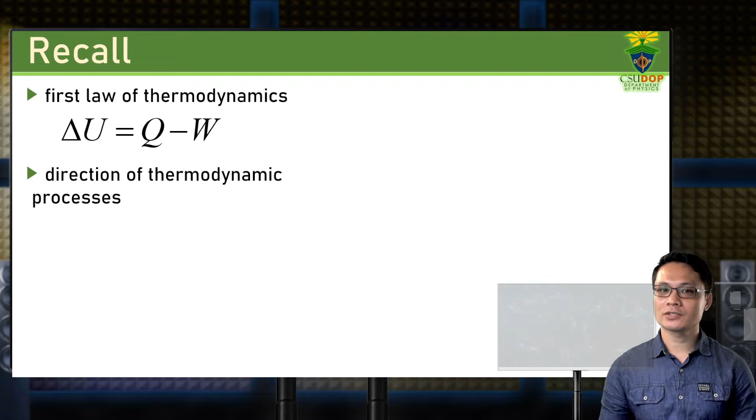Welcome back to this class, Thermodynamics. In our previous discussion, we talked about the first law of thermodynamics, the thermodynamic processes, the change in internal energy of a system, and the direction of thermodynamic processes.

In this lesson, we'll be talking about heat engines. And again with me in this course is Dr. Jonathan P. Manigo. In our time, we are familiar and exposed to heat engines.

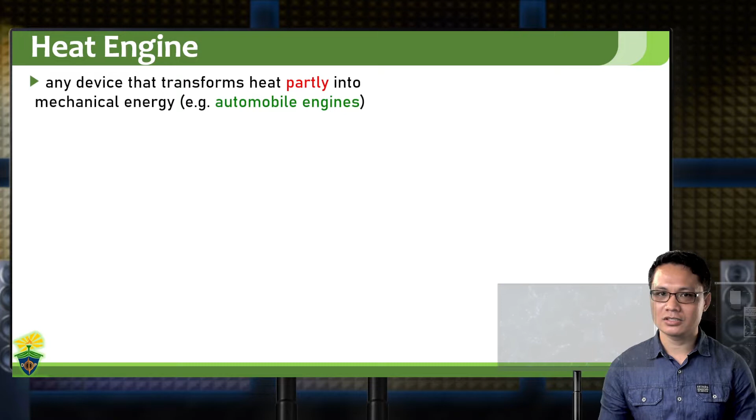A heat engine is any mechanical device which has the ability of transforming part or portion of the heat energy introduced or given to this engine into some mechanical energy or mechanical work. The common example of these devices or engines are our automobiles or car engines.

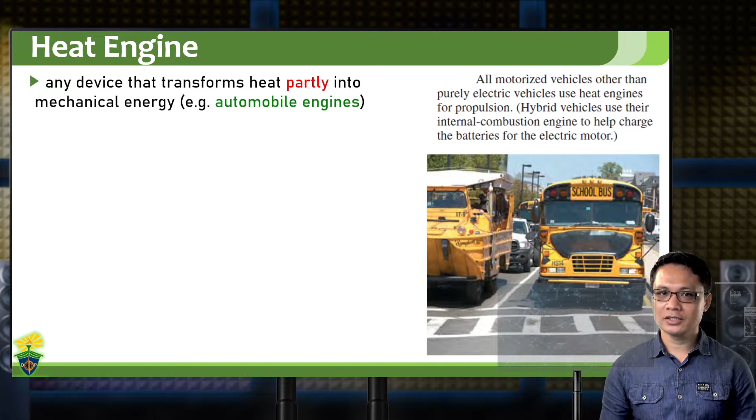Car industry for a long time has been driven with heat engines. But of course with recent technology, some are purely running on electricity and some are running purely on internal combustion mechanisms. But for the simple concept of mechanical heat engine, this is a cyclic process.

Example, a steam turbine. The primary matter used for the cyclic process is water, where there is a liquid form of water converted into its gaseous form, making the turbine rotate and therefore enabling the car transmission to rotate its wheel system.

The process of making this engine operational is trying to maintain its internal energy, by which the change of internal energy would always be equal to zero. Because if the internal energy of a steam engine would change over time, it would mean that the engine will stop working. So for a good performing heat engine, its change in internal energy should always be equal to zero. But it does not mean that the engine is not using or releasing any form of energy.

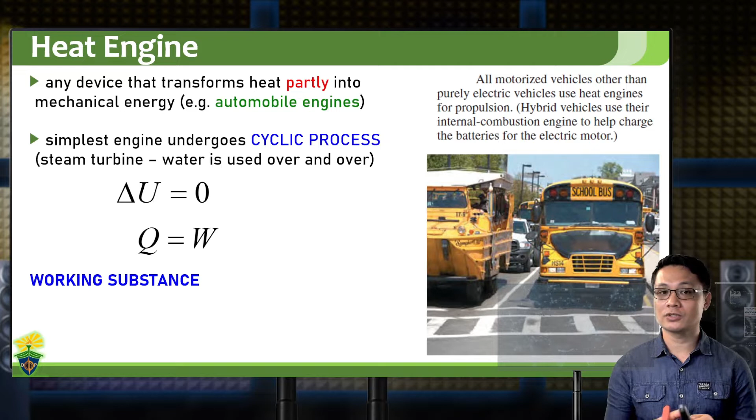It's just that the amount of heat being given to the system would always be equal to the work done by the system. So the working substance for a heat engine may vary depending on the application and the source of the working substance or matter.

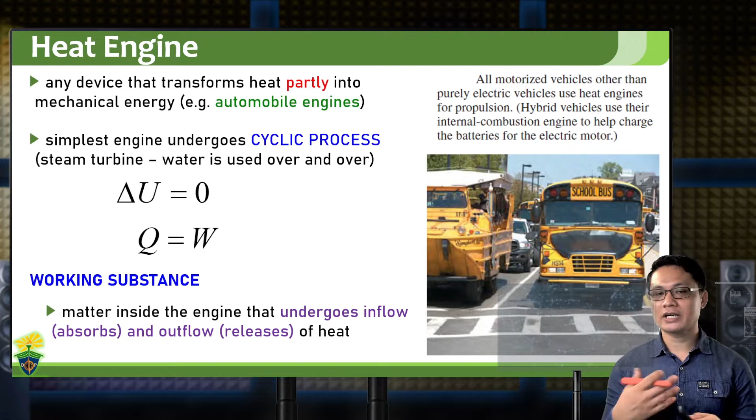These are designed specifically for a specific design of engine. There are engines which require gasoline, there are engines which require diesel, and there are engines which require steam. But the concept is just to provide a mechanism for the cyclic process to occur within a specific type of heat engine.

The concept of heat engines is just a simple mechanism by which you have a source of heat, source of energy. We call it the hot reservoir with some temperature TH, which is the source of the quantity of heat from the hotter region, which will be converted or utilized by the engine.

For this particular illustration, we have the engine in a circle shape. This represents the engine, where this circle, or the device which performs the heat engine mechanism, would separate this amount of energy or heat into two forms.

One form is, of course, the mechanical work that this engine is doing to deliver its job, and some of this heat or energy will be converted or discarded into some other form.

The usual scenario where we experience the conversion of this energy from the hot region to its working mechanism is our engines in motorcycles or automobiles, part of which is converted into the gear mechanism, the working mechanism of the gears of the engine, and some is converted into some form of sound waves.

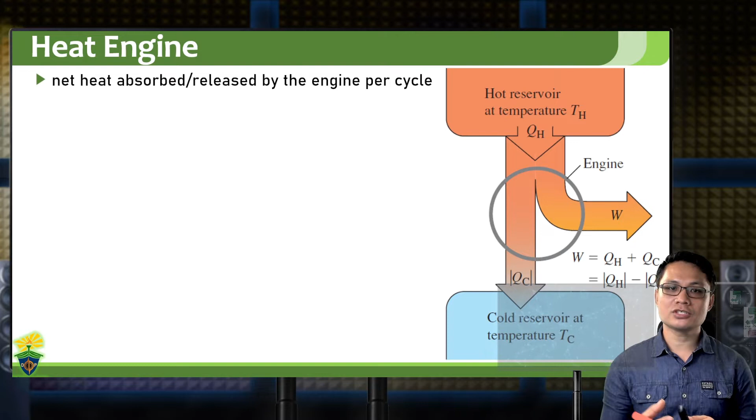Those are discarded energy. The most obvious conversion of energy is the heat which is dissipated around the engine towards its environment. This mechanism of conversion of heat energy given or introduced into the heat engine will always be conserved. This is the mathematical representation, where in reality the amount of heat discarded into the environment or the cold reservoir is, mathematically, in a negative notation.

So the net work done by or on the engine per cycle is just equal to the amount of heat the engine is using from the hot reservoir, less the amount of heat absorbed by the cold reservoir. So the total input of heat

given or introduced into the engine would always be equal to the output heat or energy delivered by the engine through its work and absorbed by the environment. This is the cyclic process: some amount of energy is given to the engine from the hot reservoir, some is converted into mechanical work, and some is converted or delivered towards the cold reservoir.

Because of this separation of the work delivered by the engine and the amount of heat being absorbed by the cold reservoir, there is an important performance measure of the engine, and that is the thermal efficiency, which is also related to the mechanical efficiency of a heat engine.

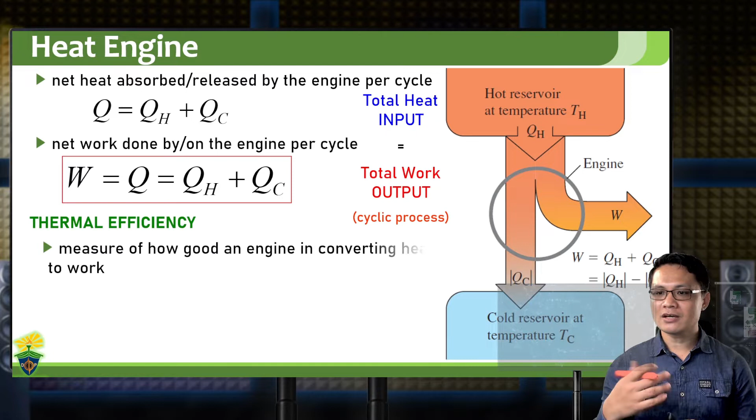This thermal efficiency is a measure of how good the engine works. This is the ability of the engine to deliver mechanical work relative to the amount of heat it is absorbing from the hot reservoir and the amount of heat discarded towards the cold reservoir.

This thermal efficiency, or engine mechanical efficiency, is the ratio between the actual work done by the engine over the amount of energy given by or taken from the hot reservoir. If you want to express it as a percent, simply multiply this by 100%.

This can also be calculated by adding 1 to the ratio between the amount of heat expelled to the cold reservoir over the amount of heat being absorbed from the hot reservoir.

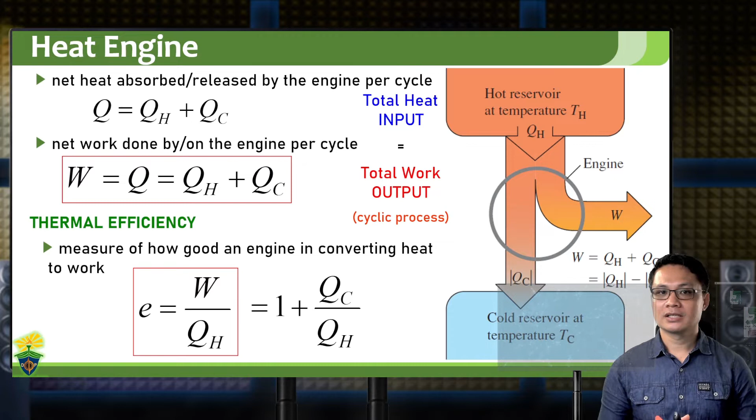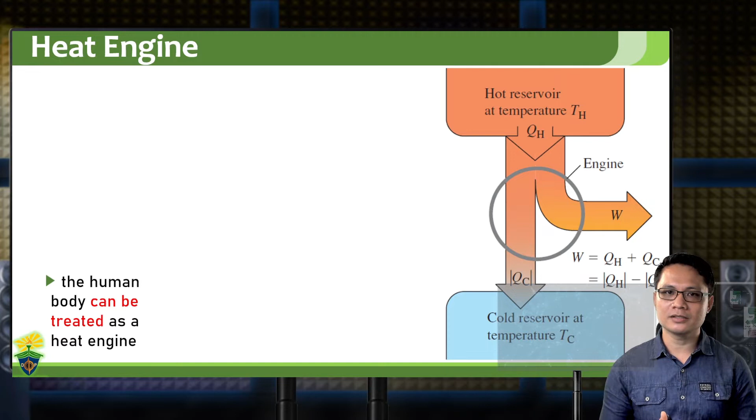Our body can also be treated as some kind of heat engine, though our body operates in a very complicated mechanism. But we can apply some concept of heat engine to how our body operates. We take some source of energy which are later converted into usable energy form for our body to function, such as muscle work.

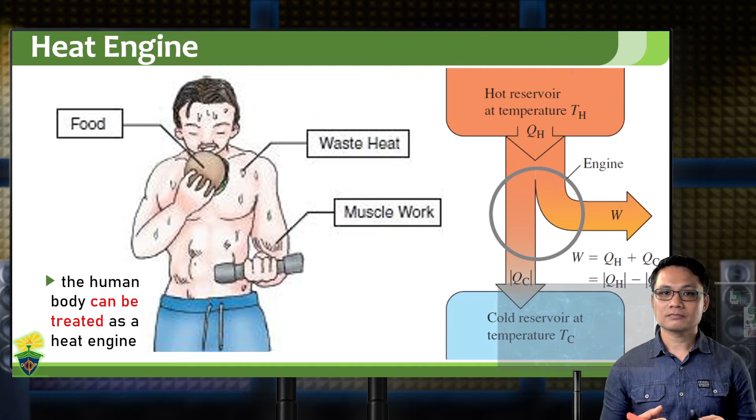In the process, not all of the energy contained in our food or drinks is converted into mechanical or usable work. Most of this energy is converted into waste, some in the form of sweat, some in the form of urine and stool. Our body also dissipates or discards energy that is not converted into mechanical work.

As an example, we will analyze how a heat engine converts and processes energy and how this cycle occurs, or how this cyclic process behaves over time.

Let us consider a simple gasoline engine in a large truck which takes in an amount of heat of 10,000 joules and delivers only 2,000 joules of useful mechanical work per cycle.

The heat is obtained by burning gasoline, since this is a gasoline engine. This kind of gasoline has a heat of combustion given as 5 times 10 to the power of 7 joules per kilogram. For one kilogram of this gasoline, it would require 5 times 10 to the power of 7 joules for it to be fully burned.

So we have the following questions to answer. First, what is the thermal efficiency of this engine? Second, how much heat is discarded per cycle? Third, if the engine goes 25 cycles, or works 25 times per second, what is the power output of this engine in watts and in horsepower? Then, how much gasoline is burned in each cycle? And lastly, how much gasoline is burned per second and per hour?

For letter A, from the equation given, we can solve for the efficiency of the engine as the ratio between the actual work done by the engine and the total energy given off by the hot reservoir. We have 2,000 joules being used by the engine in doing its actual work over the 10,000 joules delivered into the system. So the efficiency of the engine is 0.2, or simply 20%.

This 20% efficiency means a lot of energy is being discarded into the cold reservoir. For letter B, we solve for this amount of energy being discarded. We have the equation that the total work done by the engine is the sum of the total energy from the hot reservoir and the energy given off to the cold reservoir. Simplifying, we get the amount of heat given off to the cold reservoir as the difference between the work done and the heat from the hot reservoir, which is 8,000 joules.

It is said that the engine goes 25 cycles per second, meaning every second the engine performs 25 works. Remember that power is expressed as the amount of work done over how long this work takes, so power equals work over time. Since we are given the frequency, the amount of work performed by the heat engine every second, we can solve for the time as 1 divided by 25 cycles per second, which gives us 0.04 second.

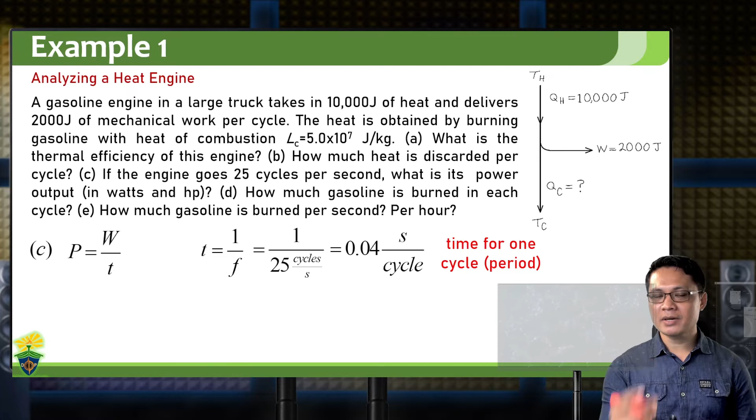So that's the amount of time used by the engine to perform 1 cycle. This will give us the power of the engine to be 50,000 watts, where we have this conversion that for every 746 watts, that is equal to 1 horsepower. Then this will give us that the horsepower of this kind of engine is 67 HP.

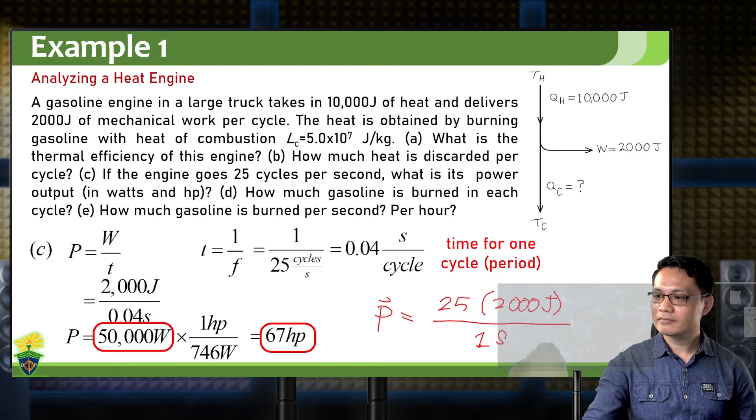And alternatively, we can solve this like the power of your engine is just equal to 25 cycles, where in every cycle it requires 2000 joules. This 25 cycles is done in just 1 second. Again, this will give you the same value of 50,000 watts.

So now we will try to solve for the amount of gasoline being burned by this engine. So we have the amount of heat given from the hot reservoir, which is the source of the work done by the engine, and some of it is being discarded into the cold reservoir. Since we are given with the heat of combustion of this kind of fuel or gasoline, we can solve for the mass of the gasoline being burned just to generate 10,000 joules of energy.

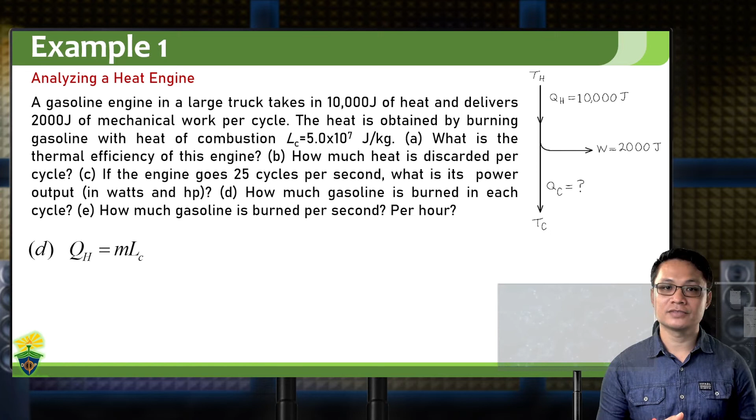So we have here the 10,000 joules divided by the heat of combustion of the fuel or the gasoline, which is 5 times 10 to the power of 7 joules per kilogram. And with that, the amount of gasoline required for this kind of engine to generate a heat of 10,000 joules is 0.2 grams.

Then, for every 0.2 grams of gasoline per cycle, which is performed by the engine in just 0.04 seconds, the engine used 5 grams of gasoline per second. And converting this to amount of energy for an hour, we have 1 kilogram, which is just equal to 1,000 grams. And for 1 hour, we have 3,600 seconds. Then this will give us 18 kilograms of gasoline per hour.

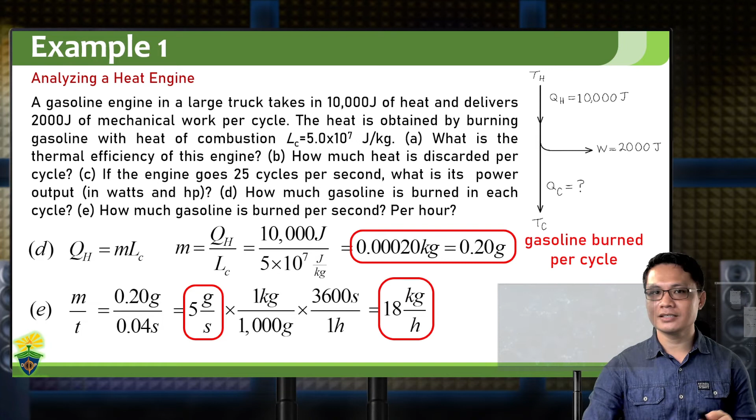And this 5 grams per second, you can solve this directly by just multiplying 25 cycles divided by 1 second, because we know that the engine is doing 25 cycles per second. Then the same would give you a value of 5 grams per second. And again, the total amount of gasoline being burnt in this kind of engine in 1 hour is 18 kilograms.

So with this kind of understanding, you can actually calculate your expenses when it comes to the amount of gasoline your car or your motorcycle or your heat engine in general is using every time you run your engine. Now, the more your engine performs more cycles in 1 second, it would entail more gasoline being burned per second. And eventually, the more you allow your engine to do its work, the more it would require gasoline for it to perform that work.

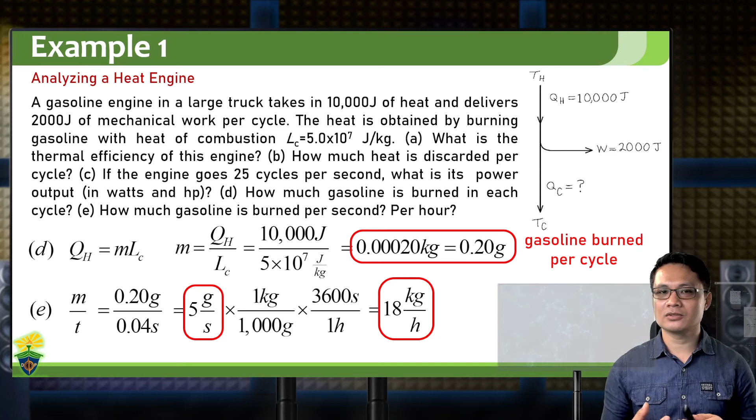And remember, just like the literal engine, our body is not converting the energies perfectly into usable work. On average, our body is also at around 20% efficient in converting energy into usable work.

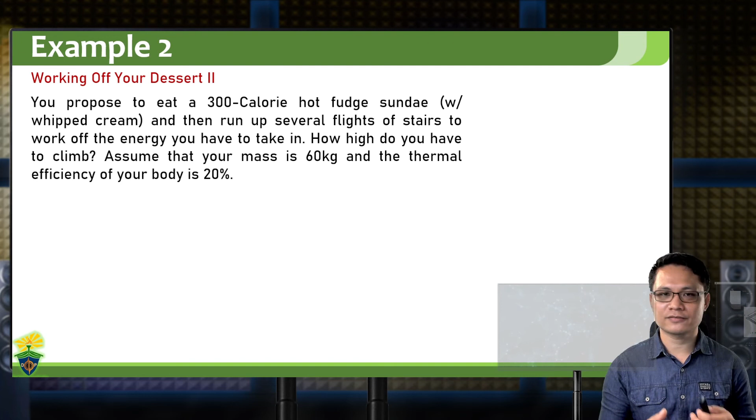So if you are around 60 kilograms and with that body thermal efficiency of 20%, we will try to solve this just a serve of hot fudge sundae with whipped cream to ensure that you will not store up this calorie into a form of fat in your body. You need to work off this 300 calorie energy. So the question is, how high?

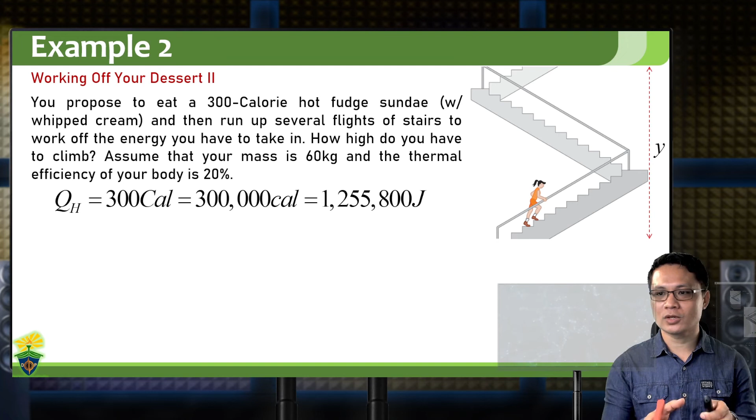How high? The letter Y here. How high you should be climbing to burn this calorie up. So you have the total amount of energy that is considered to be the energy from the hot reservoir, which is 300 calorie with capital C, which is just equal to 300,000 calories, or that is just 1,255,800 joules. We have this conversion that for every 1 food calorie, capital C is just 1,000 calories, or that is 4,186 joules.

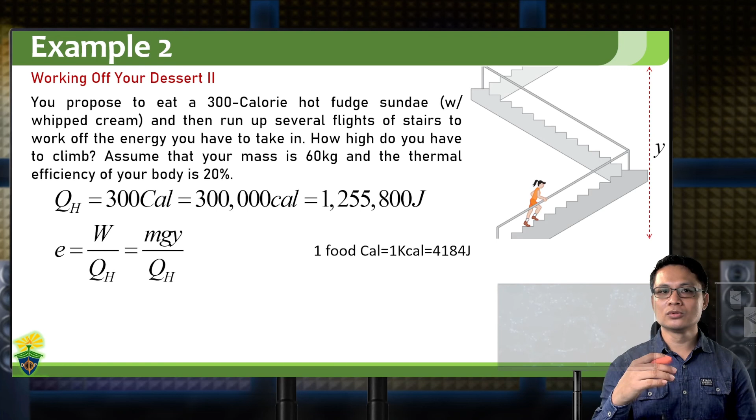Now, from the efficiency given, we can solve for the vertical height which we need to go. And this work that your body would be doing is working against gravity, and that is, you need to gain gravitational potential energy, which is expressed as mgh. I hope you can still remember this one. So from this equation, we can simplify the expression, extracting an expression for Y, and that is just efficiency times the total amount of heat from the hot reservoir divided by mg.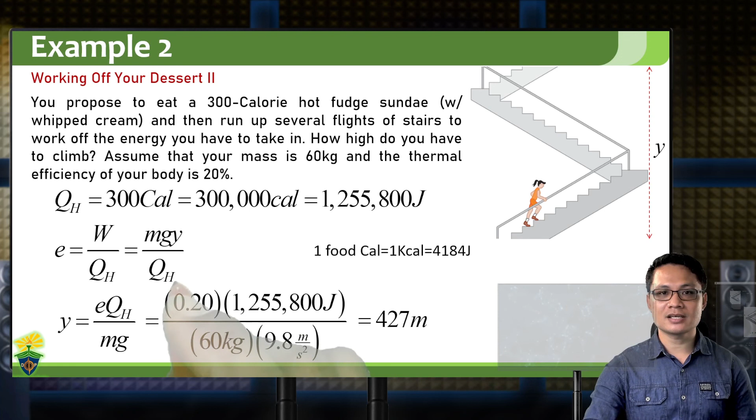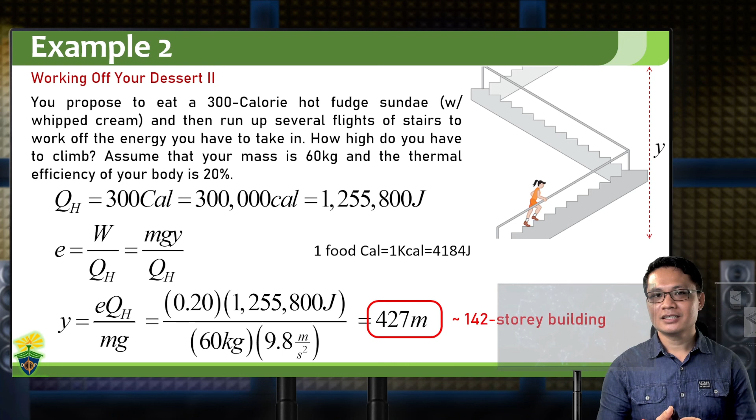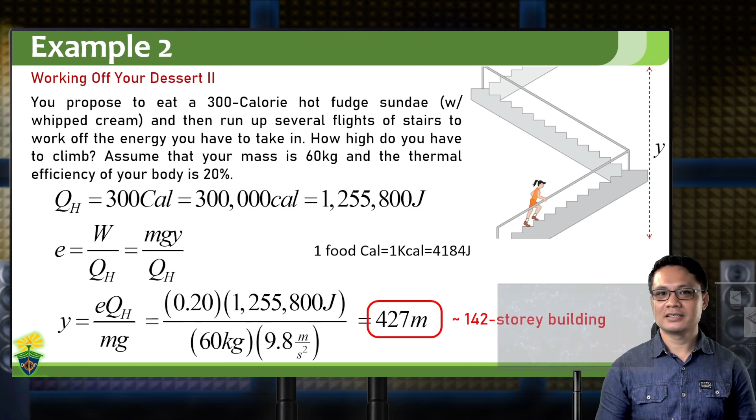And plugging in values, we get 427 meters. Just to give you the idea, how high is 427 meters? That is equal to a 142-story building. So the next time you would be eating sources of energy, consider your work and how would you burn off this energy that you are taking in. Thank you for listening.